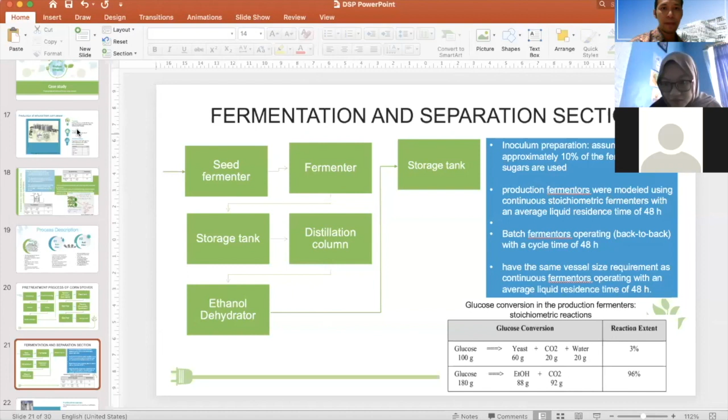Assalamualaikum everyone and good morning. Thank you to Dr. Yusof for inviting me for this slot on the application of Superpro Designer in bioseparation processes. I'm sure some of you have heard about Superpro Designer.

It has been used for the class. You can simulate the separation processes using this software. At the end, you may know the overall process, where you can get information like material balance, energy balances, sizing of the equipment, the overall cost of the plant, and also the scheduling of the processes.

May I know if any of you have used this Superpro Designer software before? Anyone? I'm asking the listeners while giving the lecture. I'd like to ask if any of you have used it before. Students, you may unmute your speaker and answer the question. Any representative would like to answer? Okay, might be they just started the engine, I think. So I may proceed with the lecture.

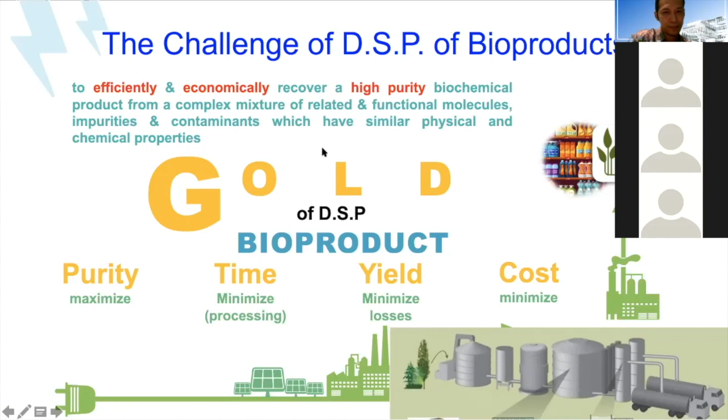Okay, so when you do the bioprocess design, there are 7 questions that you need to answer, because for bioprocess design, you have to be clear what are the raw materials and utilities that you require, the amount of resources, the size, the total amount of resources consumed per year, what is the required size of process equipment and supporting utilities, the cost of the capital investment, and the manufacturing cost.

And you have to think in the case of when you run the process, if you have to stop for certain time due to unavoidable reasons, you might think whether the existing facility can be used for the new plant required or any other kind of product.

And you have to think about the optimum size. What is the optimum batch size? How long does a single batch take? How much product can be generated per year?

The scheduling and throughput, the bottlenecks, which process step or resources constitute scheduling and throughput bottlenecks, and the environmental impact, and the best alternative among the several alternative approaches.

So that's why, as a bioprocess or biotechnology engineering student, you have learned before the material and energy balances. You have to learn unit operations, heat and mass transfer, and all this knowledge you have to blend and apply in the bioprocess design.

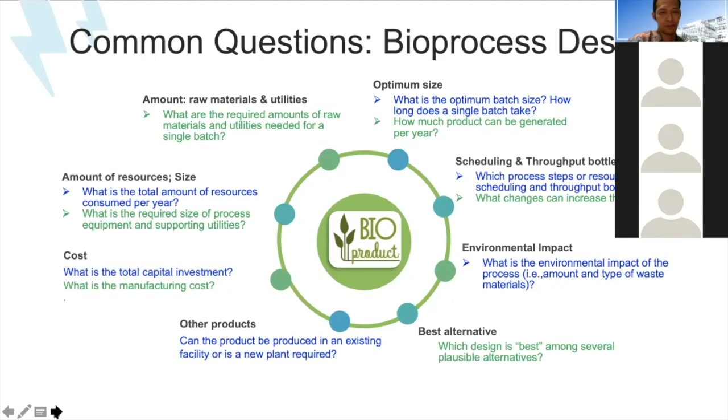Okay, so I think you are familiar with these 4 stages in bioseparations. In the beginning, you have to do the separation of insolubles, isolation of product, next is purification, and the last is polishing.

Okay, I'd like to ask you, why have these 4 main stages been proposed in the bioseparation process? Why could it not be jumbled, like firstly you do the separation of insolubles, why can't you jump to the purification process and then to the polishing? Why do you have to do it step by step? Can anyone answer me?

Maybe I want to answer the question. Okay, first, if we do a purification for the product from separation of insoluble, it's more than one compound or one type of product, then we cannot do purification directly, but we should isolate the product first. Then we can do purification to the product.

True, maybe true, because if we do purification from the product from separation of insoluble, there is still a lot of product that we don't need. So the process of purification is not going to be optimum.

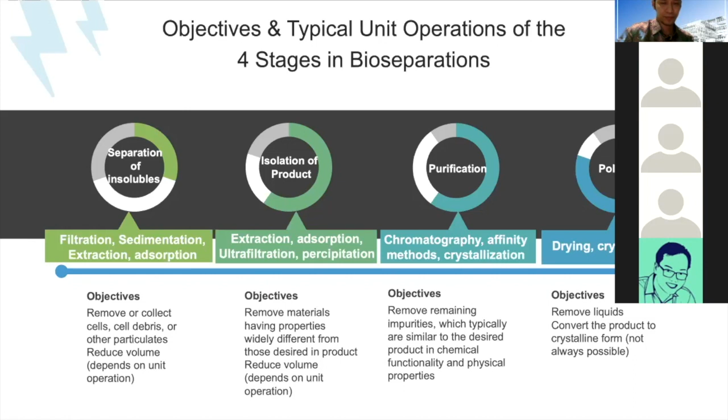Next slide, please. Okay, so before we go to the SuperPro Designer, I'm sorry, I do not simulate it in this lecture. I just show you the theory part. Maybe later on I can show you how to actually run the simulator SuperPro Designer.

Okay, so you can see the overview of a typical biologic manufacturing process. This one is the case where you produce the product from cell culture. You can see that the steps are very long actually. You have to get the cells from the bank vial, do the spinner and shake flask before you go to the bioreactor and further to the large bioreactor.

And now you can see that they remove the cells through centrifugation or depth filtration. Then you do the harvesting, then you start the product capture, and the last part is fine purification. So in process design, you have to design an efficient and economical process.

You have process synthesis: the selection and arrangement of a set of unit operations or process steps capable of producing the desired product at an acceptable cost and quality. The second one is process analysis, to evaluate and compare different process synthesis solutions. The synthesis step is usually followed by an analysis step, and the result of the analysis determines the subsequent synthesis step.

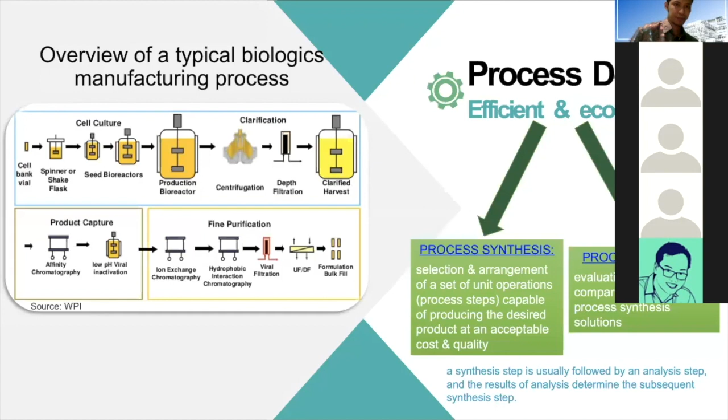Okay, so these are the process options you can refer to. You have to know first whether your product is intracellular or extracellular. From there, you can see the unit operation options for downstream processing. If intracellular, you have to do cell harvesting, cell disruption, remove the cell debris, and then start to extract the product.

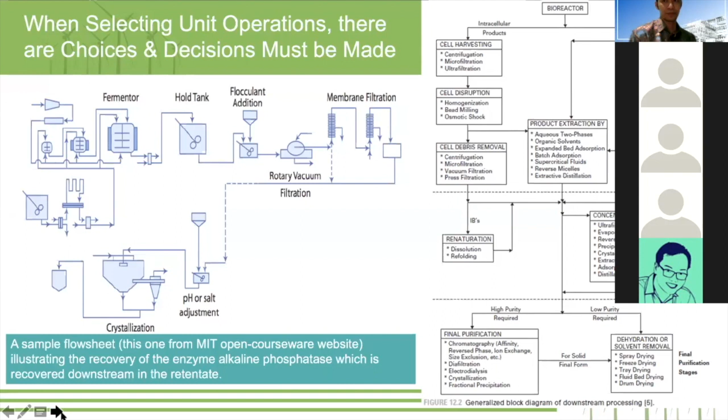If your product is in inclusion bodies, you have to do renaturation, then concentration. That's why I told you, you have to know the purity level of your product, low or high, because there are different unit operation options to use. In the case of extracellular, you can omit cell harvesting, cell disruption, and removal of the cell debris. Okay, next slide, please.

Here you go for process analysis. You need to know four elements: capital investment, manufacturing cost, environmental impact, and other criteria. If you do it manually, there are many things you need to do. That's why with SuperPro Designer you'll be able to get all that information, but you have to key in certain data to get things like material balances and energy balances.

So when synthesizing bioseparation processes, you might pair unit operations in process synthesis, for example extraction and precipitation, hydrophobic interaction chromatography, or filtration and extraction. Okay, next slide, please.

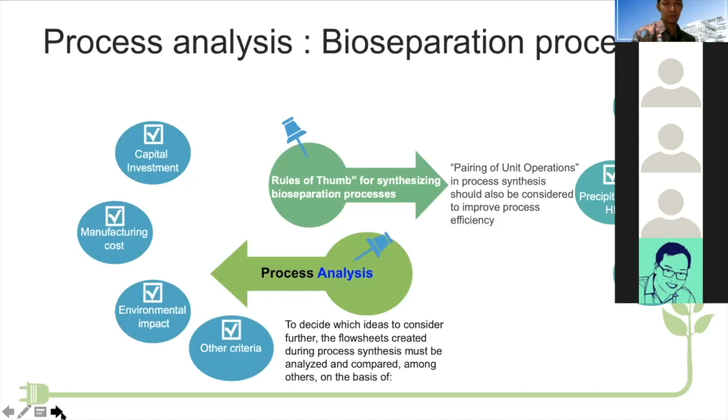For the next slide, you can see here the main criteria for developing and evaluating bioseparation processes. When you do the simulation and choose the unit operation, you need to consider these five factors. The product purity, because some unit operations, for example chromatography, are specific for the purification step. So to get high purity of a product using chromatography, you have to ensure that all the contaminants are removed first. From there, you can maximize the purity of your product using chromatography.

Robustness. Some unit operations are robust, like for example, the centrifuge. But you have to choose the right centrifuge because not all centrifuges can be used at large scale. The common centrifuges used at large scale are the disc-stack and the tubular. Some centrifuges cannot be used at large scale because a centrifuge depends on the rotation speed. If you apply high rotation speed to a large centrifuge, it's not safe, might be harmful to the labor, and will also be costly.

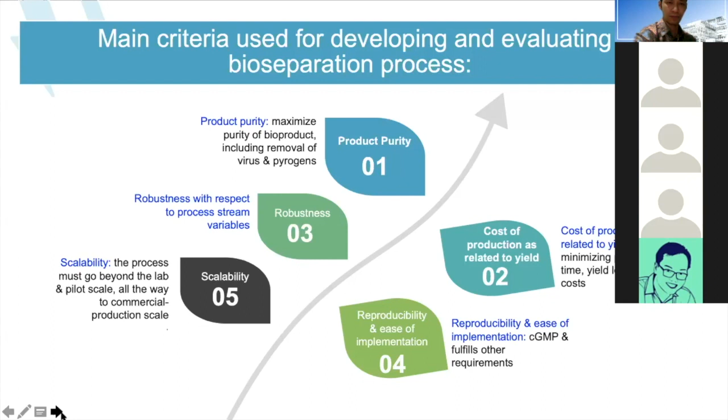The process simulator. When you perform the simulation using SuperPro Designer, you'll be able to analyze the integrated processes in terms of economic evaluation, equipment sizing and costing, material and energy balances, environmental impact assessment, process scheduling, and debottlenecking of batch and continuous processes. I will share with you one case study, which is ethanol production from corn stover.

Before that, I'd like to ask you. I mentioned that using SuperPro Designer, you'll be able to get all the data like economic evaluation, equipment sizing, material and energy balances. Before you start SuperPro Designer, how do you set the raw materials required in the process? Anyone here can answer me? Because you have to put in some data before you use SuperPro. Anyone have an idea? I'll give you an example. For example, you have to produce 5,000 tons of ethanol per year. How do you start to get the amount of raw material?

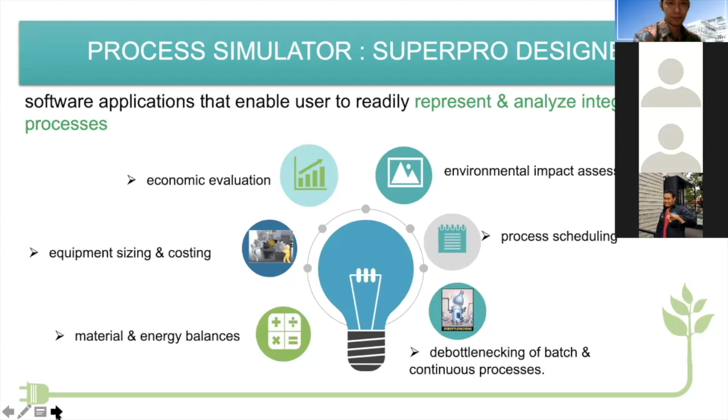Okay, before I go to the real case study, I'd like to explain one more slide. Okay, Dia, next, slide number 10.

Okay, you can see here, this is the initial step that you need to perform using SuperPro Designer. You have to develop a flow sheet by putting together the required unit operations. I prefer you to run the unit operations one by one first before you add other unit operations. If not, you might get some error, then you cannot complete the simulation. So first step, if you need the reactor first, you put the reactor first and you draw the line of the stream. You have to determine how many inputs and how many output streams for your unit operation.

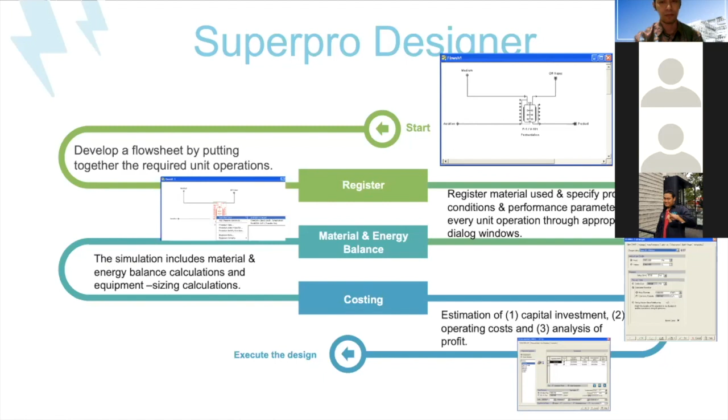Okay, Dia, can you go straight to the case study? Case study is on page 17.

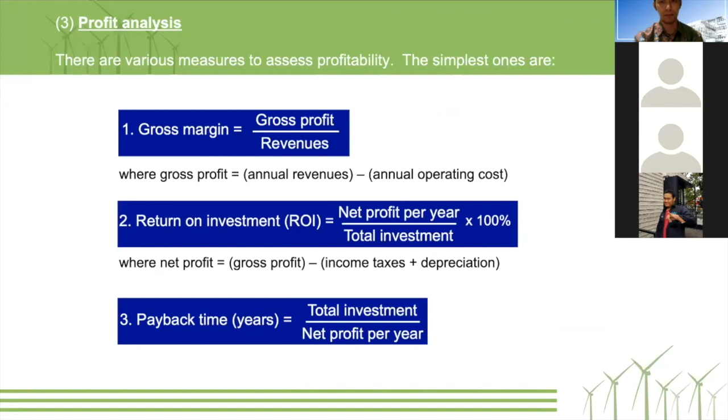Okay, here. This is a production case study: production of ethanol from corn stover. You can see that it's already calculated here. The feedstock flow rate is 2,000 metric tons per day of dry mass of corn stover, which is equivalent to 4,000 metric tons per day of wet biomass, and the target is 18 metric tons per hour of fuel grade ethanol. So annual production is equivalent to 6,044 gallons per hour and 47.8 million gallons per year.

Okay, so in order to insert the data in SuperPro, you have to know the components in the corn stover, because if you put just corn stover, you cannot solve the problem. That's why you have to know the components of the corn stover, which are cellulose, hemicellulose, and lignin. The top three components are what you need to key in.

The rest might be neglected, because it's difficult if you put the ash and other solids, since they don't have an empirical formula. So when you key them into SuperPro, it couldn't generate the data in the output stream for you, and you do not know the amount of it, right? How much? Okay, so next slide.

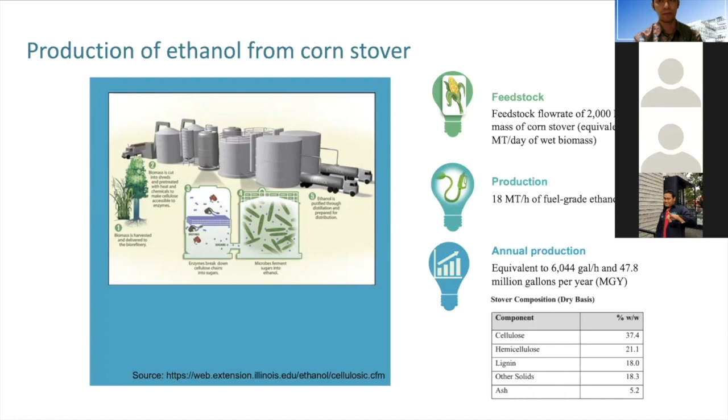Okay, so you can see that in this case, the corn stover went through two steps of pre-treatment. First is thermal hydrolysis. Second is enzymatic hydrolysis. I'd like to ask you, in these two processes, what unit operations are required that you choose and put in your SuperPro Designer? Anyone can answer me? The unit operation.

Okay, in the lab, what equipment, what glassware would you need to use for the thermal hydrolysis and enzymatic hydrolysis? Anyone can answer me? Or are you not clear with my question? Class?

Maybe the question is not clear enough, because from my perspective, my internet connection is not that good. So maybe that's my problem. Okay, sorry.

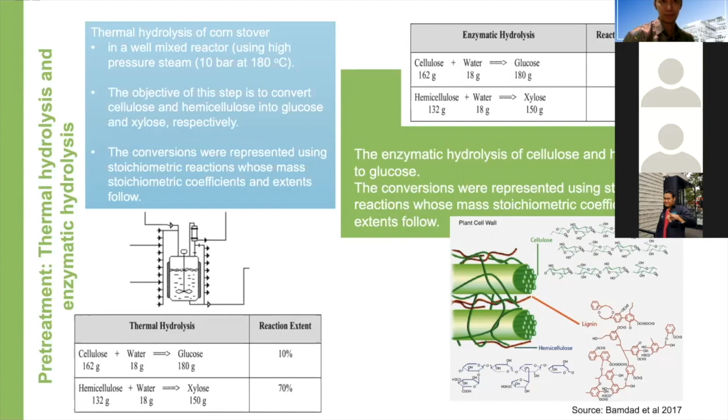Okay, can you go to the next slide, please? Okay, the next slide. Okay, next.

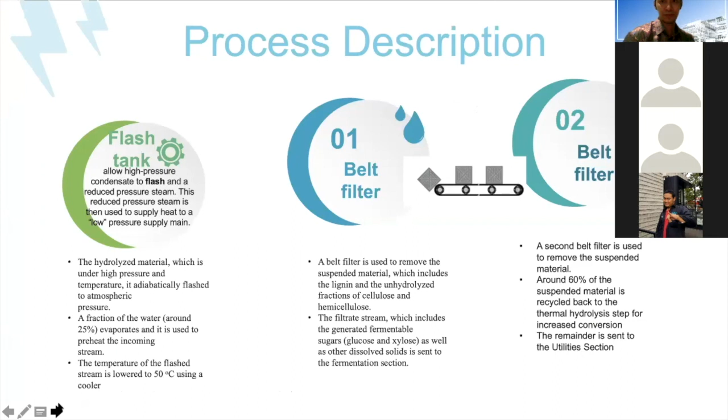Next slide. Before you start the simulation, you have to sketch first what processes are involved in your production process. You have to be clear. Like I said before, in the downstream processing, there are 4 stages: separation of the insolubles, extraction of your product, purification, and the last one is polishing. So you have to sketch first.

So in this case, I start from where you get the feedstock. From the transporter, you have to wash the corn stover first, grind it, sieve, and then go through the screw conveyor, and the next step will be the pre-treatment. The pre-treatment involves the thermal hydrolysis reactor, the flash tank, and the belt filter, the enzymatic hydrolysis reactor, belt filter again, and then to the storage tank.

So you have to sketch this first, then you have a rough idea how to design using the Superpro Designer. I suggest when you put all the unit operations, you put them one by one. You put the thermal hydrolysis reactor first, you key in the input data, and then you draw the output stream, and then you run, you simulate.

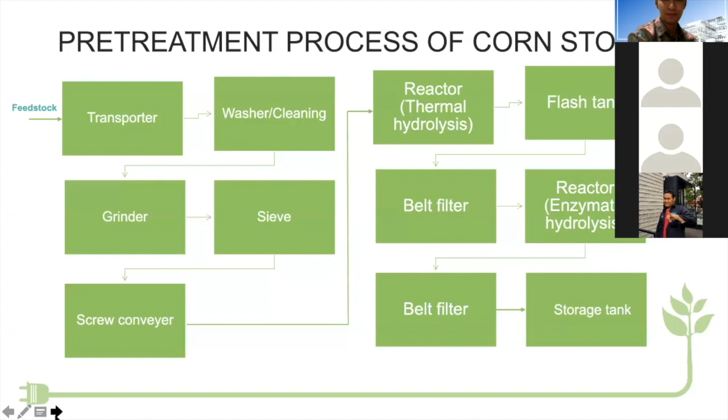After pre-treatment, we go for fermentation and separation section. Next slide please. So in this case, you do need the inoculum column and then fermenter. Here is a very simple process for the separation section where they use the distillation column.

But in this case, there are two distillation columns required. The first distillation column is used to get the 40% ethanol solution, and the second one will generate high ethanol solution. I'm sure you are familiar with distillation columns, it's just you need to know how many unit operations you need to get high purity of the ethanol.

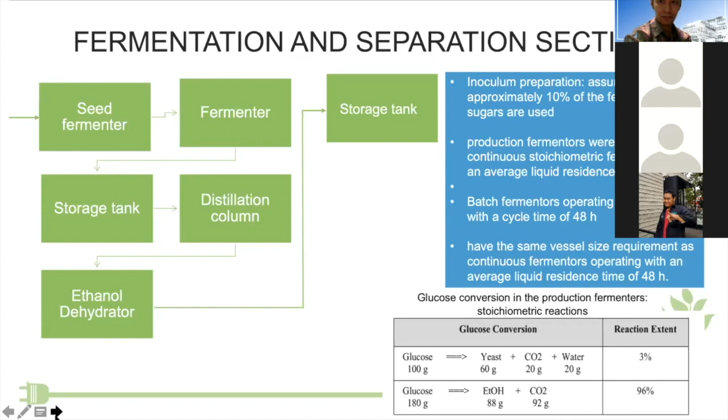And the last slide, go to page 23. Okay, these examples are quite small, so sorry. This is the profitability analysis from this production of ethanol. From the simulator also you can get this kind of profitability analysis. Normally, in my case, I will ask my students to do the manual calculation first, to find the working capital cost and manufacturing cost, before they key in the data in the simulator. Then from that it will simulate the result of your actual plant according to the target of your produced product.

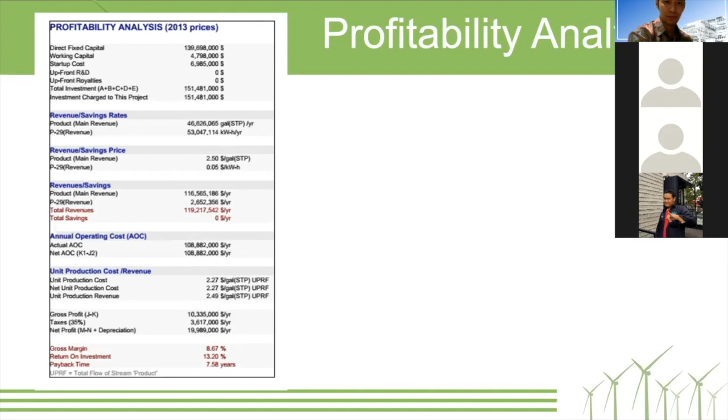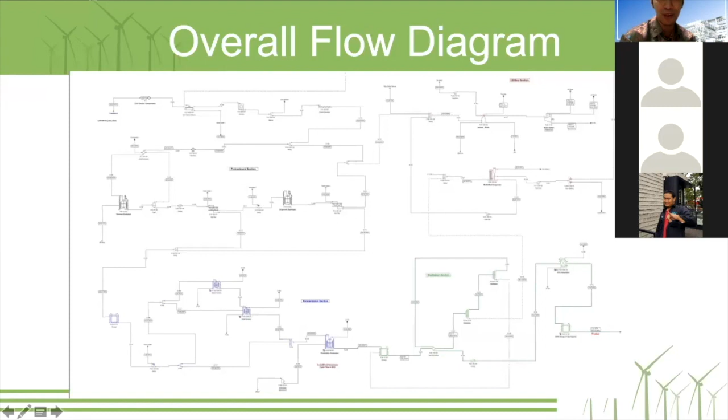Thank you Dr. Zun for a very good presentation that gives an overview about bioseparation processes in general, explaining that there are 4 steps and the importance of each step, then giving an example for the corn stover production system, and how to use tips and tricks to begin with SuperPro Designer, and at the end you can see these overall flow diagrams. Before we proceed to the question and answer, I believe students have a lot of questions to ask regarding SuperPro or bioseparation processes in general.

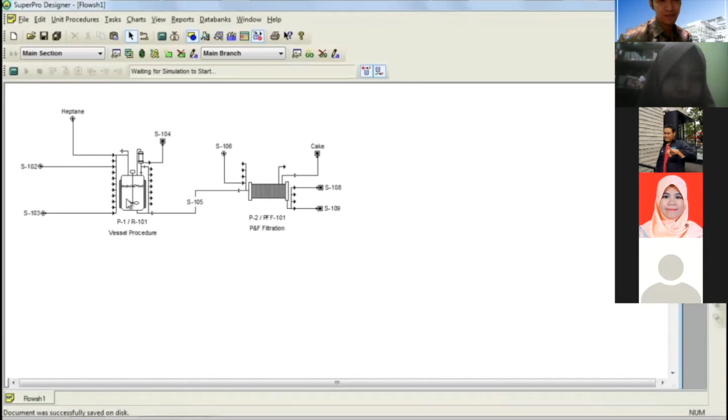Proceed to minute... Therefore, the next step in the model is to initialize the operations that were added to the two unit procedures. Let's begin with the reactor. To access the operations, select the unit procedure, right-click on it, and select Operation Data. Let's begin with the first operation by clicking on it. Through this dialog, you can access or modify the simulation data for an operation, such as operating conditions, scheduling data, emission specifications, and labor-related information. To initialize this operation, let's begin by selecting the stream we'll use for the charge. This is done using the drop-down list at the top of the tab. For this operation, select the stream named heptane.

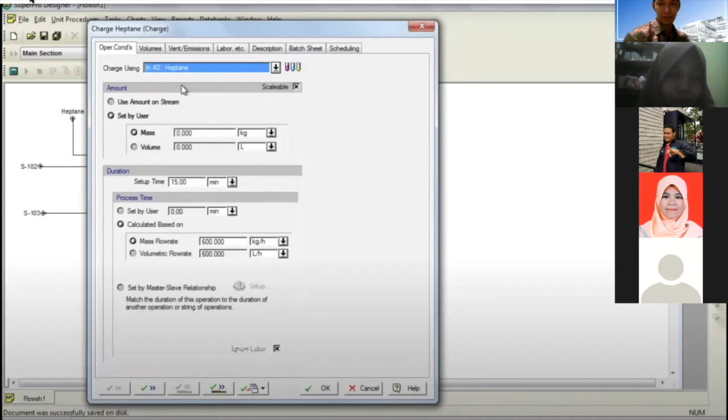I think this is part 2, right? Part 1 is what I mentioned, I posted it just now. Can you see that the one you showed is part 2, for batch process? Continuous process modeling will be discussed in a separate video.

Also, if you'd like to follow along with the model but don't have SuperPro Designer, please visit our website, as you can see on my screen, where you can download an evaluation version of the tool. In addition, you can download the full SuperPro Designer manual and several papers discussing the tool through the literature page.

Dia, can you forward a bit to the part that corresponds to the example presented in Chapter 2 of the SuperPro manual? Around minute 2:42.

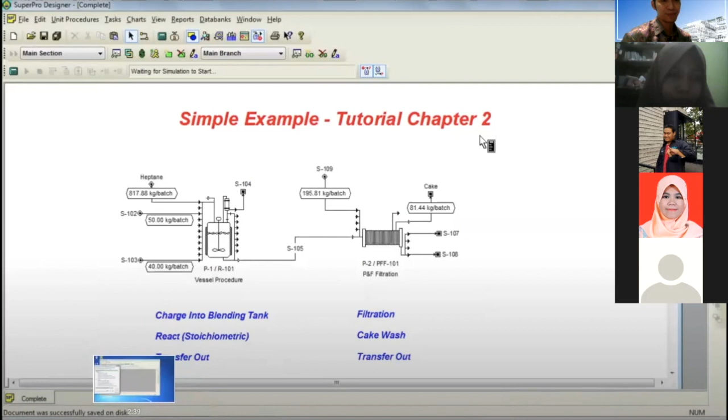Operating mode dialog appears. Okay. You pause there. So here is what I mean, batch and continuous. Okay. And then you forward a bit, okay, you forward to 334. 334.

Okay, so you can see here you need to register the components that you require for your reaction. Okay, so probably Dr. Yusof, students can study from this free YouTube Superpro on the Superpro Designer website. Okay, yeah, the YouTube. Okay, they can see clearly how to run the simulator Superpro.

Okay, so now probably they would like to ask any other question. Okay. Yeah, okay, thank you, Dr. Zun. So students, you may check www.intelligen.com. There is a tutorial of how to use Superpro for beginners. So any further questions? I believe also there are several students who have used Superpro for their case study to draw the process flow diagrams.

Maybe there are questions of how to use it properly for beginners, perhaps. Maybe to Nadia Yasmin, as far as I remember she's from the group that used Superpro to draw the process flow diagrams. Any difficulties when you try to use Superpro?

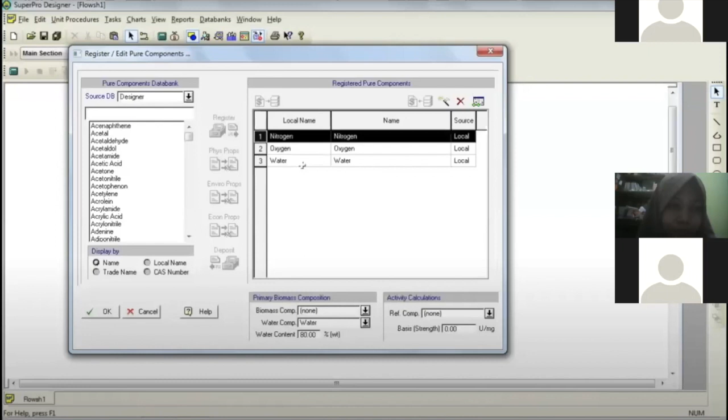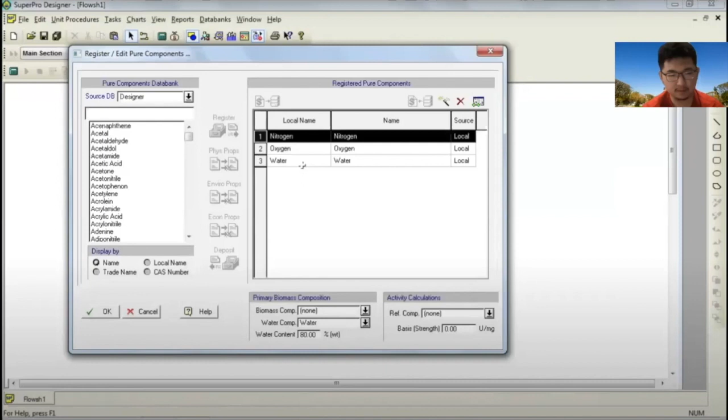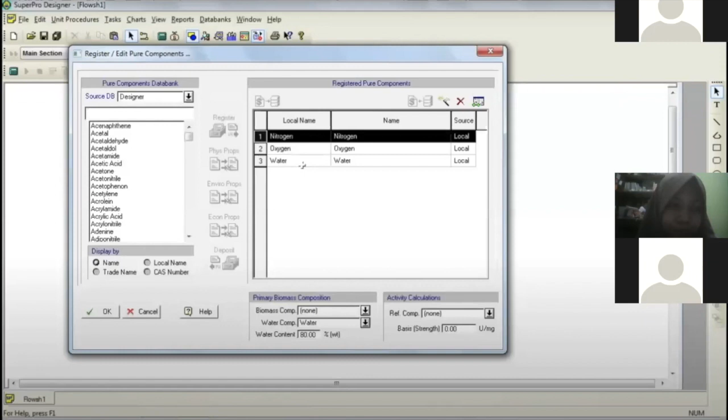Because for example in the distillation column, depending on the boiling point of the component, they might go to the bottom stream. So there might be various products that you are not able to remove initially. That's why, in the example I gave just now, you do need two distillation columns, because in the first distillation column, components with similar characteristics to your targeted product might exit in the same stream as your product. So again, you do need another unit operation. So it depends on that unit operation. You have to know clearly how many input and output streams that unit operation has.

It's not logical if you have a bioreactor but you put like 4 to 5 output streams. In the real bioreactor, you normally have one output where you collect your sample. That sample is the fermented media that consists of many components in that biomass culture, right? Then you do the centrifuge, you might get the pellet and the liquid, right? So they have two streams. Is it clear?

What's the name of that student? Nadia Yasmin, is it clearer now with the answer from Dr. Zun? But I only answered the first question.

Okay, the second question, running the overall simulation. You have to run one unit operation at a time. You cannot put several unit operations and run them simultaneously, because if not, you cannot detect where the error comes from. So, for example, you put the bioreactor, you run it first and see the output. If you can generate the data in the output stream, that means the run is successful.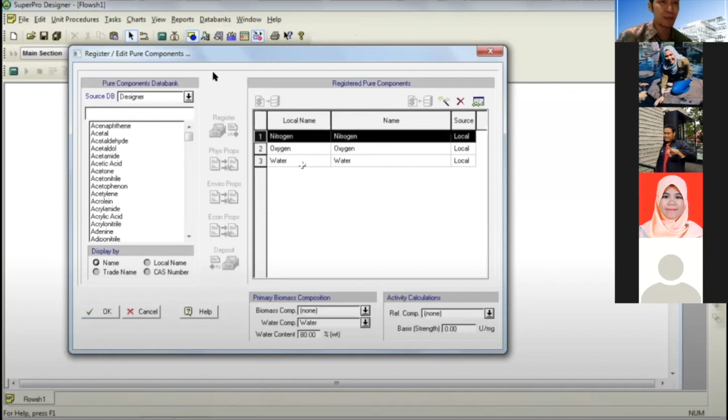All right, thank you, Angelica. So there are two questions. First is about the bead milling: can she customize the parameters in the bead milling? And second is regarding the environmental impact: are there any alarms so we know these are way above the limit, or do we have to read the results and justify them ourselves? So Dr. Zun, can you please answer that question?

Okay. Bead milling is very rare in industry. People do use the bead mill in the process, but I do not know whether you've come across a bead mill being used at large scale. If it can be used, that's good, because normally the problem with the bead mill is that when you process, there might be some debris from the beads that can damage your product.

So it's very rare in industry that they choose the bead mill. That's why I told you in the beginning, you have to justify why you use that kind of bead mill. It's not just because it's available in SuperPro; you have to know the pros and cons of using that unit operation.

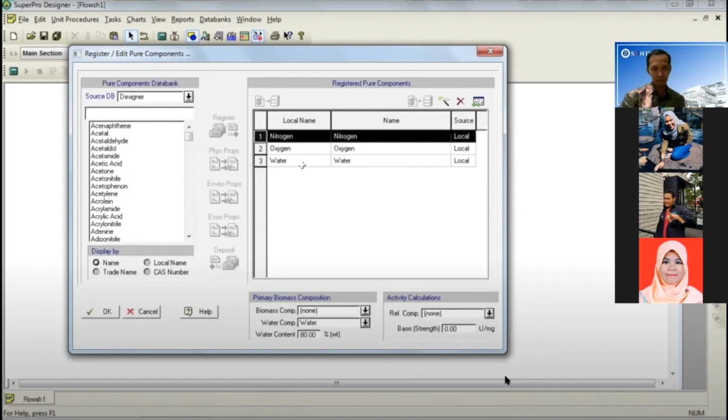For environmental impact, I don't really do the analysis in SuperPro Designer on this aspect. But normally I just ask students, for example, I will observe each unit operation that they simulate. I will see the stream output, the one that they discard. I will check the amount of water, the amount of the unwanted chemical, or any kind of unwanted contaminants. I may ask them, okay, what are you gonna do with this component, this product? Because this is a common question by the examiner when you present your simulated result.

They might ask you, what are you going to do with the sulfuric acid that has been discharged from the stream? Okay, you have to think about that, about the water. For example, to run 5,000 metric tons of ethanol, surely you will generate a high amount of water and a higher amount of other contaminants. So surely you need to do something with that kind of waste generated from that plant. Okay, so I do hope that you are clear on that. If you are not clear, I will try to dig into it again, because that is what I normally do for my student project.

Okay, so probably if I have any other extra information, I will let Dr. Yusuf know and ask him to tell you.

Okay, thank you, Dr. Zun, for the answer. So yeah, it is very important to know the environmental impact, and we can check it manually whether it exceeds or whether it's within the specification of the environmental requirement.